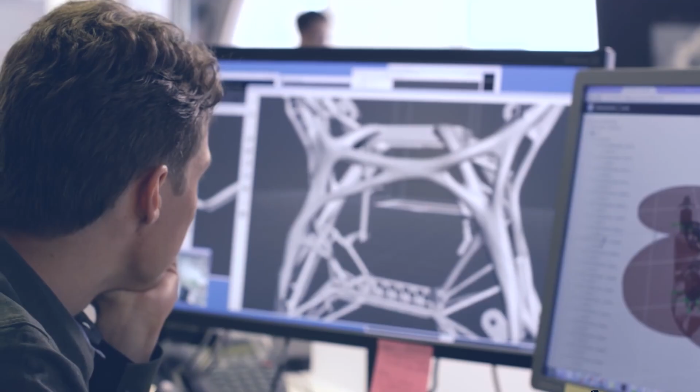Welcome to my channel. Today we will be working on exercise number 17, and we're going to learn a new command. I'm going to start by drawing a line for 38.5.

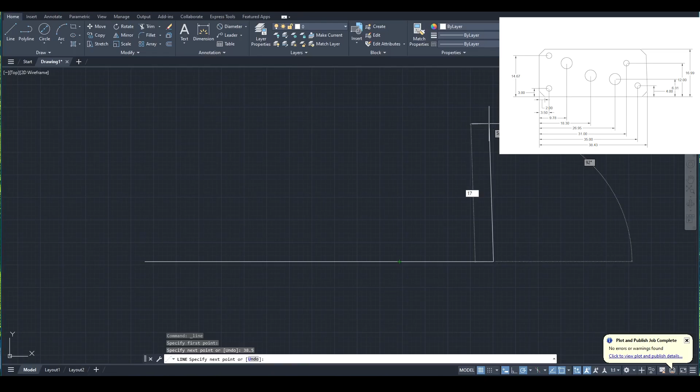And I'm going to go up 17 units. Enter. Make it into a rectangle. Escape.

Now I'm gonna have to chamfer this. You notice how on the picture the edges have been cut? That's called chamfering. Here you have a fillet command under Modify - this is if you want to round it. But if you want a straight line, that'll be chamfer.

You click on that, and then you click on angle because you've been given the angle. You want 2 units in length, so I type 2, enter. And you want the angle to be 45 degrees. 45, enter. You click on the first line and the second line, and it just chamfers it for you.

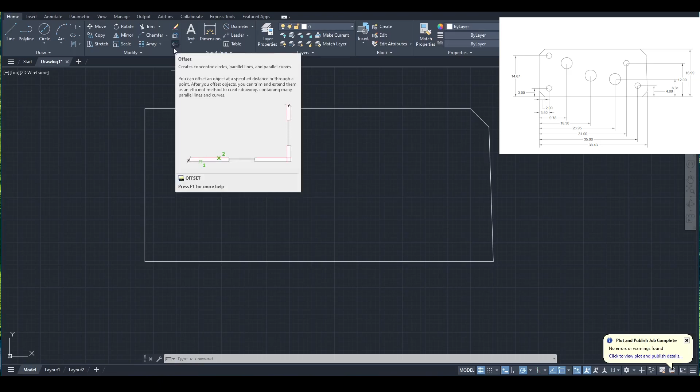In order to go back to the last command without having to retype this whole thing, you'll have to press space or the enter key. But I'm going to redo this once again so you'll see how it works.

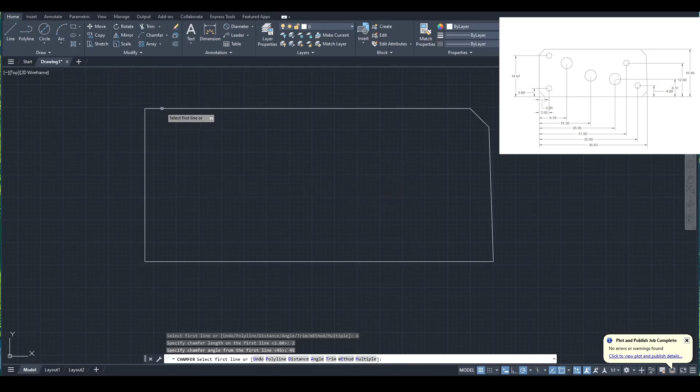I'm going to click on chamfer, click on angle, type 2 for the length, and 45 degrees for the angle. Click on this and this. Press space, repeat the last command. Press space to repeat the last command. And there we have it.

Now we're going to be drawing the circles. So I'm going to have to offset 3.5 from here to here, 14.67 from here to here, and I need a circle with the radius of 1. So I'll go center radius, click here and type 1, enter.

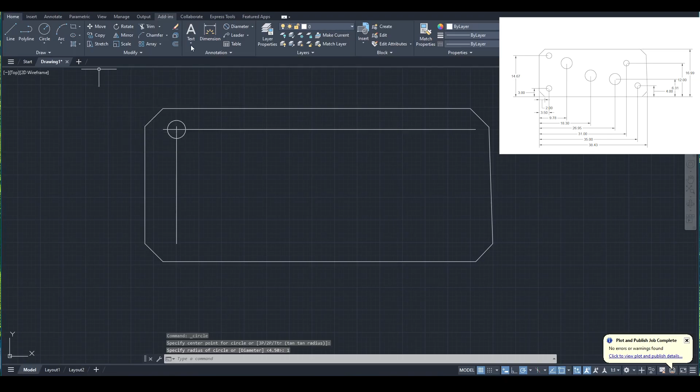I don't need this line anymore, so I'm going to delete it, erase it. I'm going to have to offset this line by 9.78, and I'm going to offset again by 12.

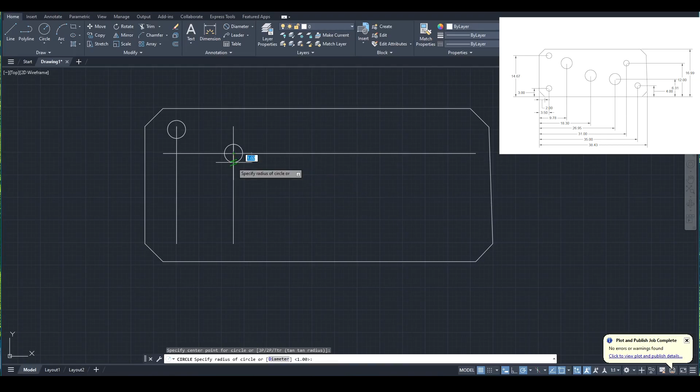I need a circle with a radius of 2. I'm going to have to offset this other line by 31.

I'm going to copy this circle right here, pick it up from the center, drop it off as where the center is supposed to be, press escape.

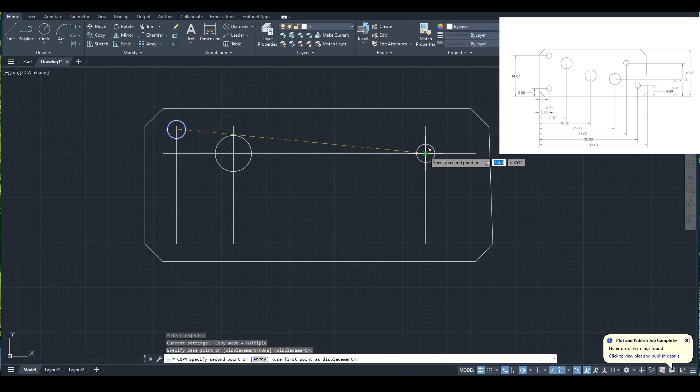I'm going to offset from here to here 7.5, 7.56, enter. 18.30, from here to here.

I'm gonna copy the circle, pick it up from the center, drop it off at where the center is supposed to be. Escape.

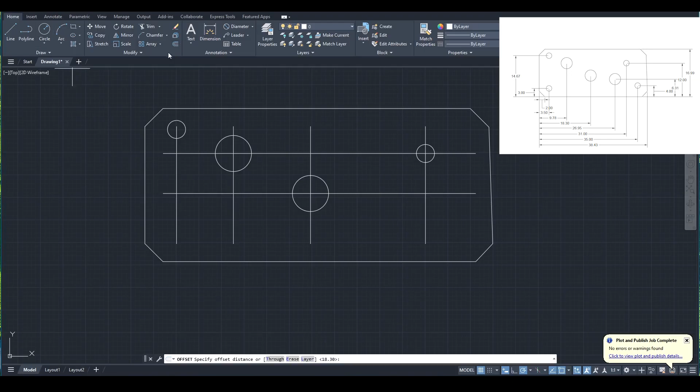I'm gonna offset 26.95. 6.31.

I'm gonna copy the circle, pick it up from the center, drop it off at where the center is supposed to be.

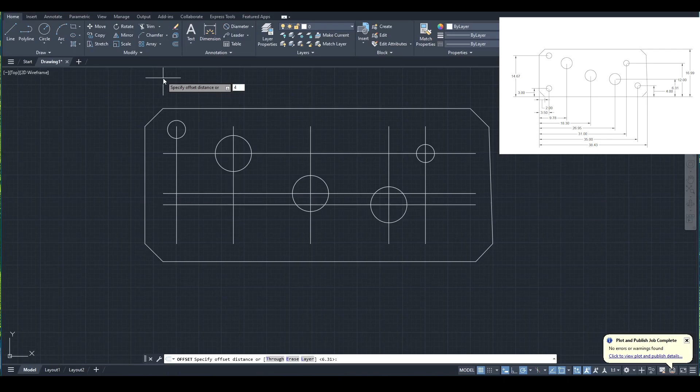I'm gonna offset again by 4. And by 35.

I'm gonna copy the circle right here, pick it up from the center, and drop it off at where the center is supposed to be.

Offset again by 3. Offset by 3.5. I had already done it, so it's gonna be on the same line. I just redrew the same line again, so I'm gonna delete that.

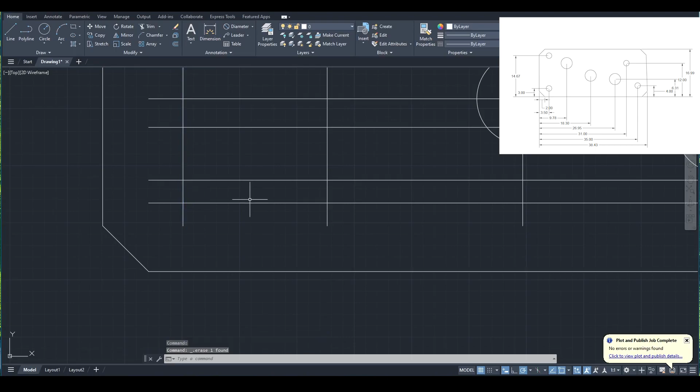I'm gonna copy the circle, press enter, pick it up from the center, drop it off at where the center is supposed to be. Escape.

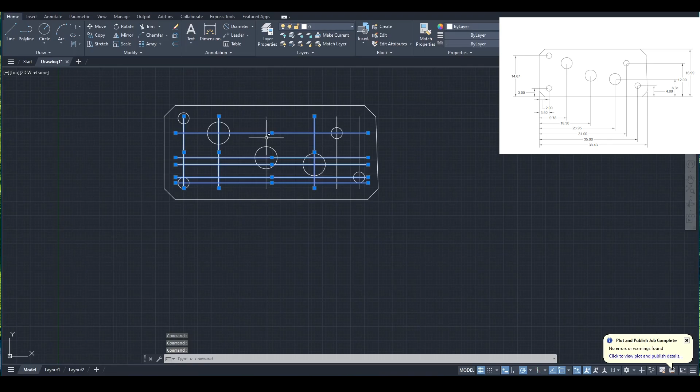Now I'm gonna delete all these lines that I don't need. Pay attention that you only erase the lines, not the circles. Delete. And there we have it.

So you notice how offsetting helps a lot, so you don't have to recalculate or calculate the lines or the distances. You just go by what is given to you.